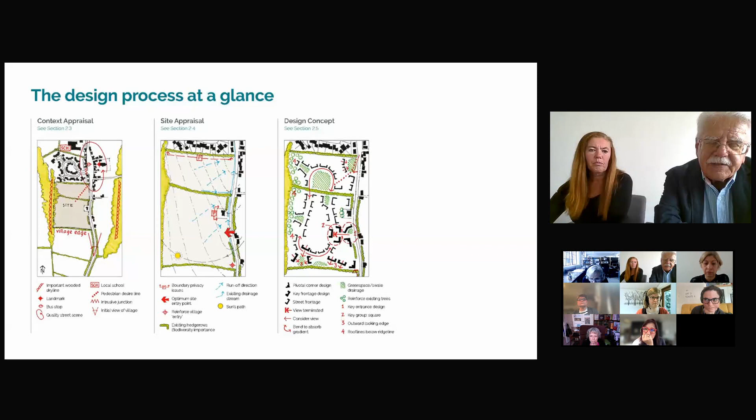So this is just a small taster of some of the illustrations, and I did think about calling this presentation 'Where Do We Draw the Line?' because very often in design guidance, if you have absolute minimal graphic indications, people say it can mean anything to anybody. If you have a diagrammatic illustration of what you want, they say, well, is that it? So we've erred towards the latter, but very much stressed in the guidance that the illustrations are to be seen as indicative, and we welcome that to be a springboard for innovative design where that can happen.

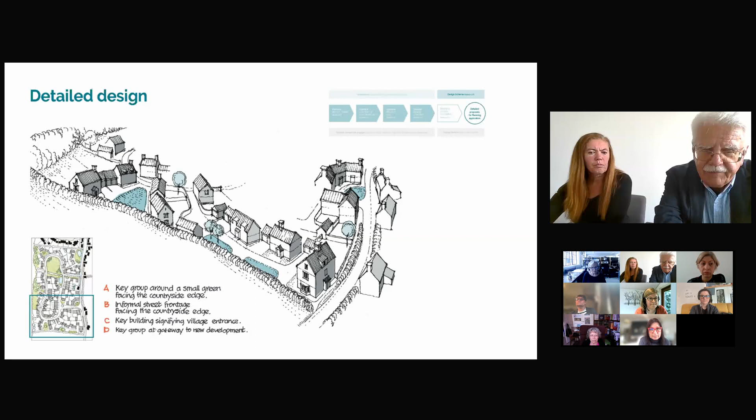So it's very important, we feel, for applicants, but also for planners. And it's important that the design guide is not purely just the local authority saying what they want, but also informing the planning staff, the development management colleagues, the elected members, everybody in the process that we think is important.

It seemed to us very important to go from the large to the small, to go from understanding the context and the site, then structuring, looking at buildings and plots, materials, and then details. Going the other way is the path to confusion and to discussion of minor points which don't really address the big questions.

At the end of each section, we had a kind of checklist of 'have you thought about' type questions, which we felt was good, both for the applicants, but also for development management colleagues to think about how they would frame recommendations.

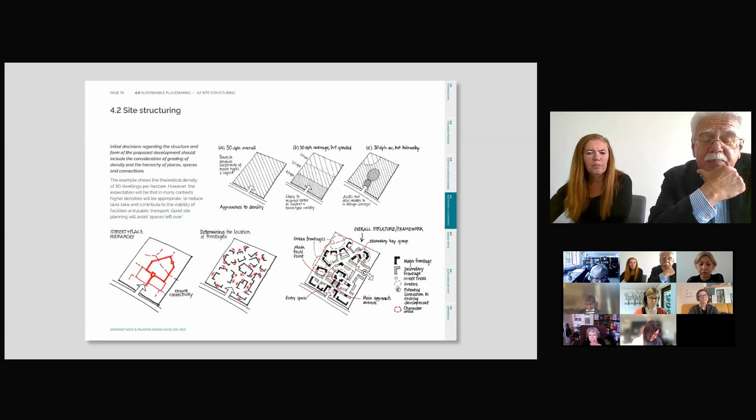For instance, thinking about the block—very often we see the block as something fairly rigid, but it can be manipulated to follow contours, the character of the streets around, and the type of tenure and density can be altered within the block, because in the area we're looking at we've got one large town, Taunton, but a number of very small towns and villages.

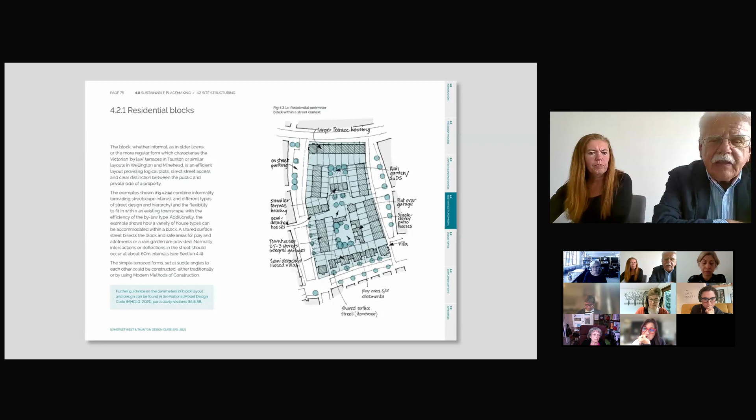So there's quite a range of development, and not all needs should be the most urban of urban design. Next, what we've tried to do here is show that sustainability principles and urban design principles can go hand in hand. Here on the sustainability principles, you can see how landscape has been considered functionally—rain gardens, plenty of absorbing spaces, ponds and community orchards, street trees, gardens themselves, green walls, etc.

And the next slide shows the same layout in terms of looking at flexible blocks and central areas for neighbourhoods, all within walking distance, the streets being as convenient for walking and pedestrian penetration as much as they are for vehicles.

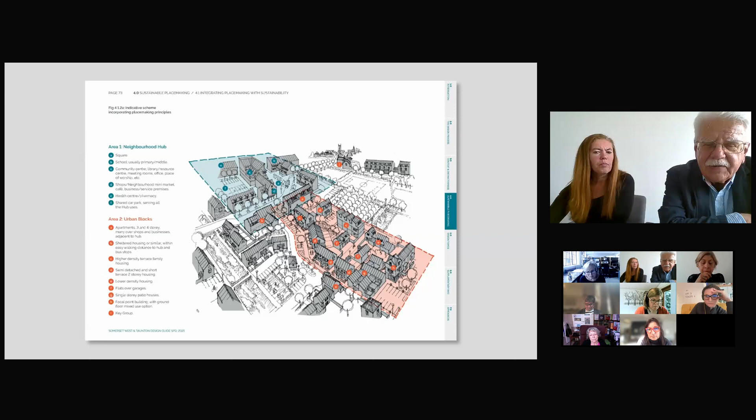We felt that it was important to emphasize—we've got a couple of minutes left. Thank you very much—to volume house builders, that they ought to develop a typology of house which contributes to street making.

And I guess this is the basis of good coding—building types that turn corners, building types that address focal points, building types that are adjusted for slope, building types that are pivotal buildings. So we went through about 12 types that we would encourage people to think about.

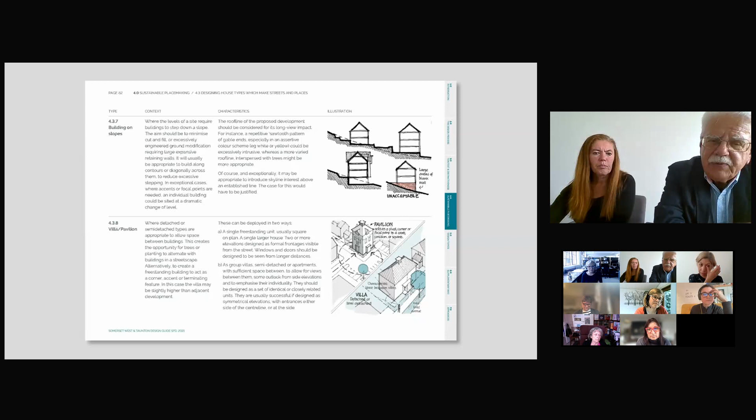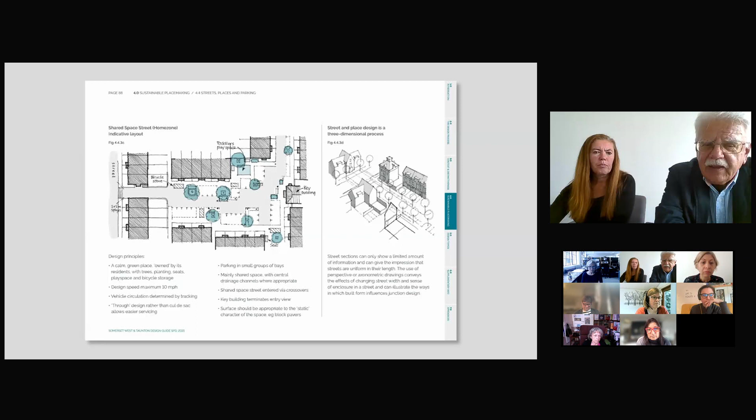Also thinking about things like hierarchy of streets, home zones—these were developed with a highway authority. And then very importantly, how do we learn from locality?

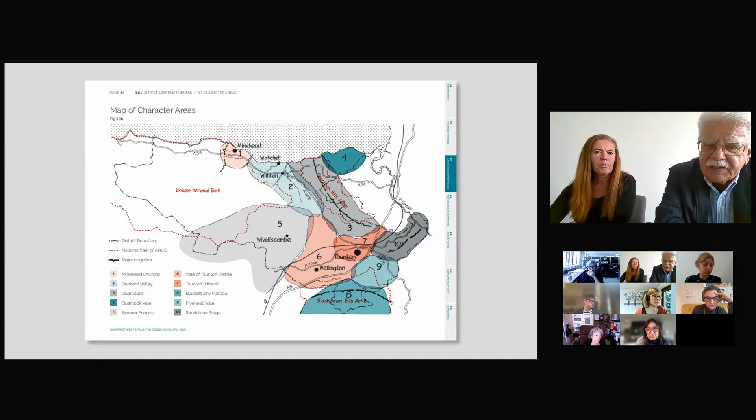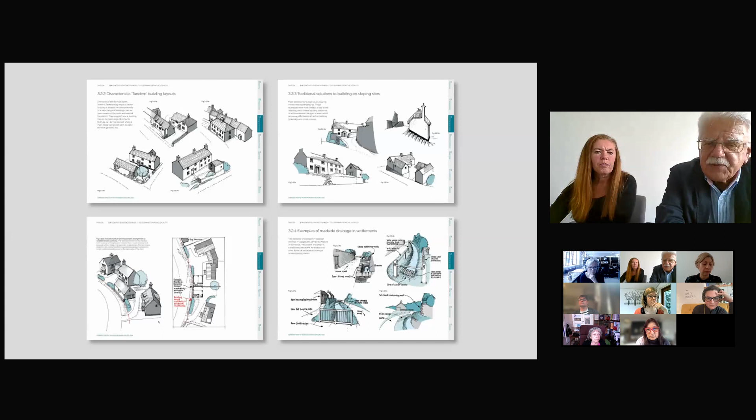Looking at patterns of development that's been built up over time. Districts are not homogeneous—they have different characters, and we stressed an analysis of those characters, and that there is a typology of inherited buildings which are important, and the ways in which buildings have traditionally related to the landscape.

Finally, it's very important that development management colleagues are tied right into the process, and we had a series of training sessions and programs, both with development managers and with volume house builders and with members, and that's continuing.

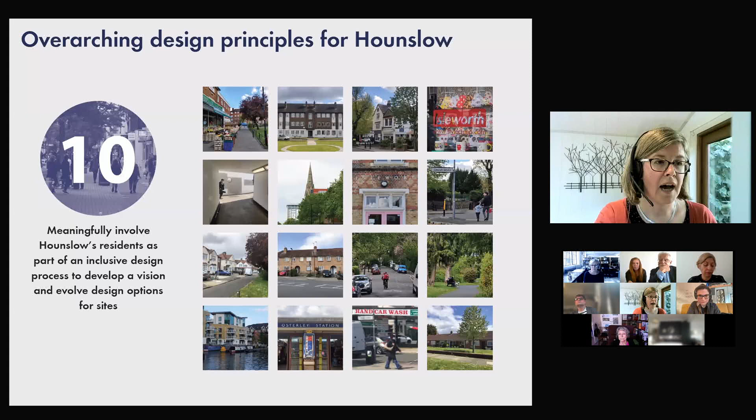There were wider bits around resident engagement, emphasising those pieces as part of the statements, and particular requirements for each application to demonstrate a good understanding of context. They had to show how they'd used the evidence within the SPD, and also how design options had been developed, refined, and how they were meeting the wider requirements.

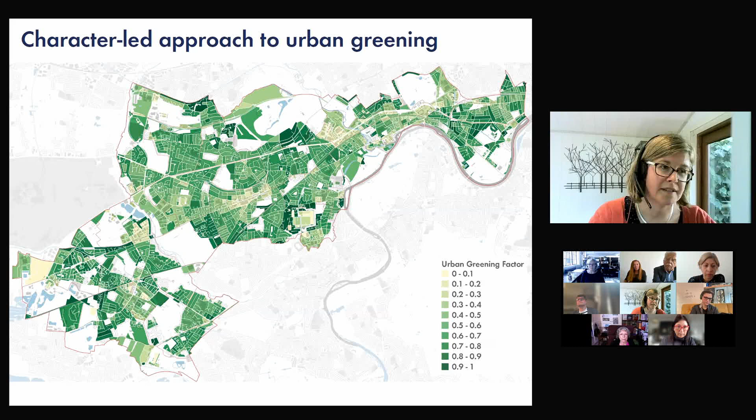Two bits we particularly looked at at that borough-wide level were around urban greening coding. There was a real desire to see if we could bring the urban greening factor analysis of existing neighbourhoods into underpinning resilience in the future. So we set a base level of code around urban greening at the borough-wide level, with a commitment to update and raise that level as further local plan reviews take place.

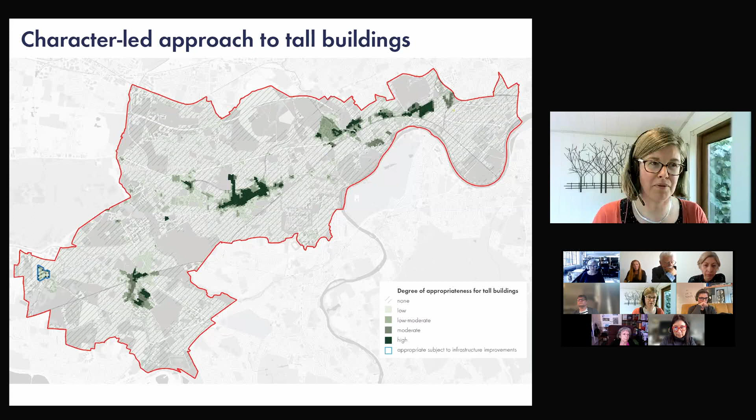The other bit was around tall buildings, which is a big local issue. There was a real desire to identify areas that wouldn't see tall buildings - that was a big local priority - but also a sense of where things might be appropriate, not where they could absolutely just happen, but where they could be.

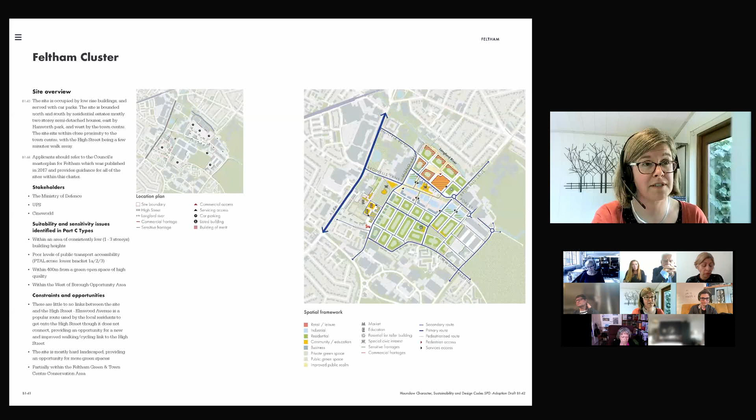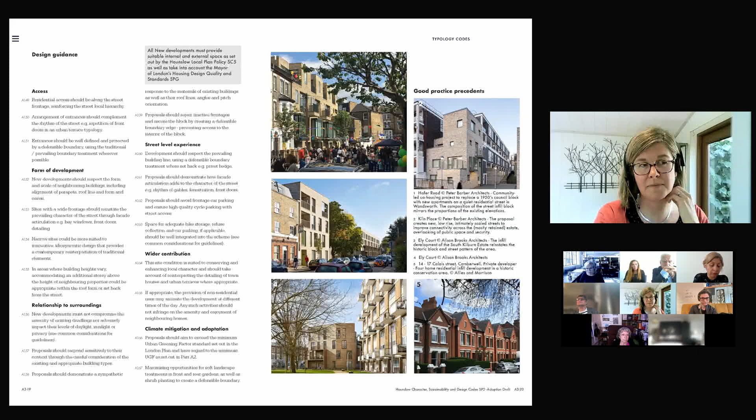On some of them we were able to provide additional design codes around particular sites where those were felt to be relevant, and on the site type side we were able to work through examples. So we provided guidance around form of development for aspects like intensification, and worked through an example. This became a really useful way to provide design coding at a site-based level that was applicable to wider sites within the borough.

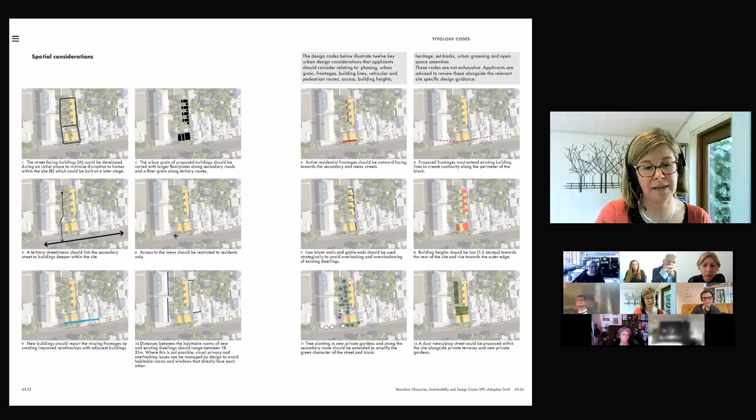So it was a really interesting process, and I think crucially a really big collaborative piece of work that has taken a huge amount of refinement with the community, and as I said at the beginning, it's very imminently about to be formally adopted.

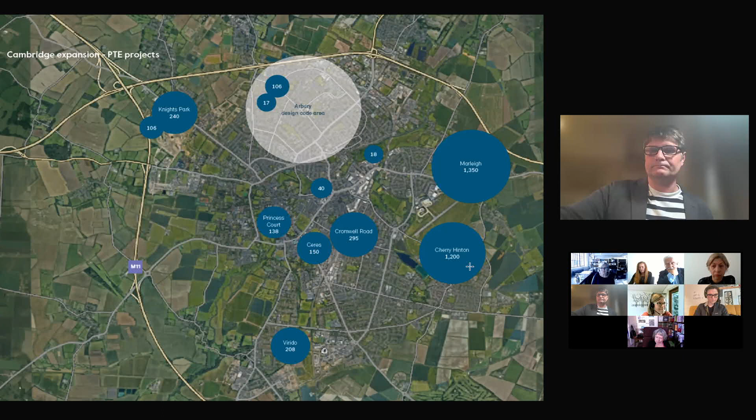Thinking about that confidence building and relationship building process, we started with a project study tour where we took our client and the key strategic officers for the Greater Cambridge Planning Service. We spent a day together going around recently delivered residential developments that had been delivered using a design code. What we wanted to do was build a really good shared idea and shared experience of what good looks like, and what we're trying to achieve.

What worked, what didn't, from previous codes? By having the people who'd actually been part of those teams there on the trip, that really helped give us a head start in what we were doing, and it also started to build that idea of a shared vision.

That then launched what was quite a dense process of different workshops, events and processes that we went through over the 9 months. We essentially broke that into 4 parts: a mobilization process where we brought people together, which culminated in that study tour.

We then moved on to a principal stage, spending a few months together going through a series of workshops and also working with the local community. There were still concerns around COVID, so much of this was online, but we were able to have quite a few processes with local residents and with the local parish council through that.

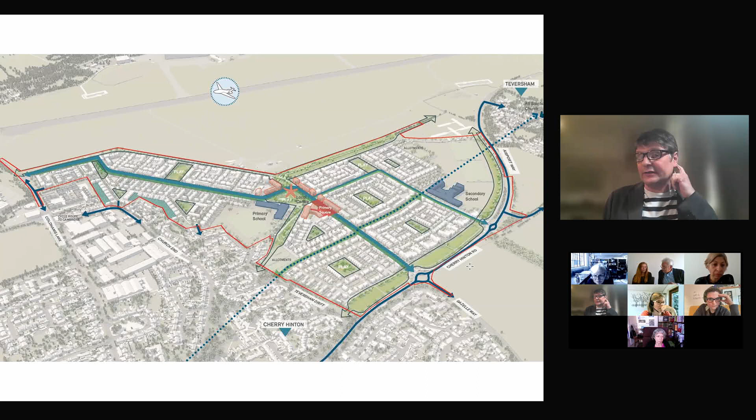Those individual neighbourhoods are then interlinked onto a network of green routes. These are traffic-free, car-free cycling and walking active travel routes, which crisscross the whole development and link everything together very conveniently and directly.

They also link together the planned secondary school right through on what we call the Ridgeway, going east-west, taking us down to the existing settlement of Cherry Hinton, and then linking up with the new Market Square and Village Green, which contains the primary school as well.

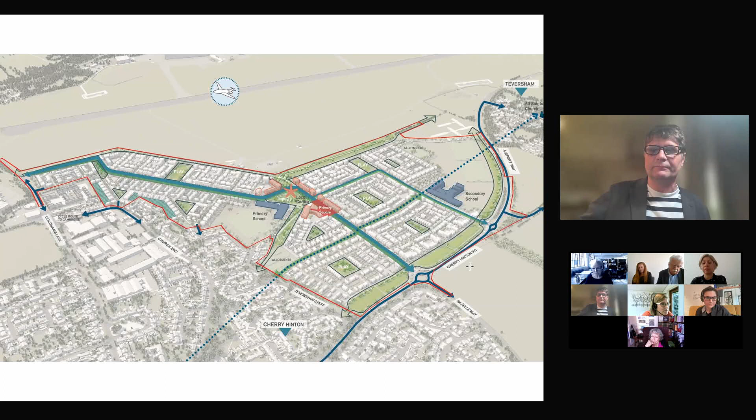Let's go to the next slide. The fundamental to how we were thinking was trying to see things in quite granular detail, always thinking at the scale of walking and the pedestrian - in this case trying to show how you draw together design for buildings, design for the street, design for urban greening, and design for things like visitors, gathering and social gathering.

And what you can see from these diagrams is what we're trying to do, thinking about the holistic design approach we were talking about earlier.

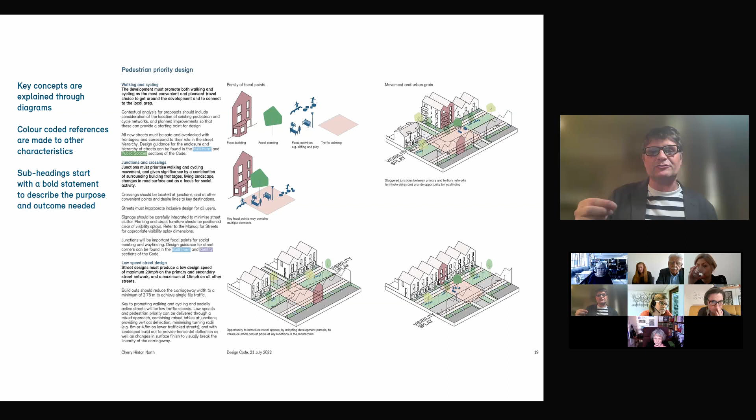Everything is explained through diagrams - diagrams are the key part of the code, really. They're colour-coded to make references to other characteristics. Then in the text itself, we use quite a controlled form of text, which cross-references to other parts of the code through colour coding as well.

Also, what you can see here is how buildings were coded within the diagrams to really make sure that all frontages were engaged with the front doors or principal windows, to get that sense of eyes on the street.

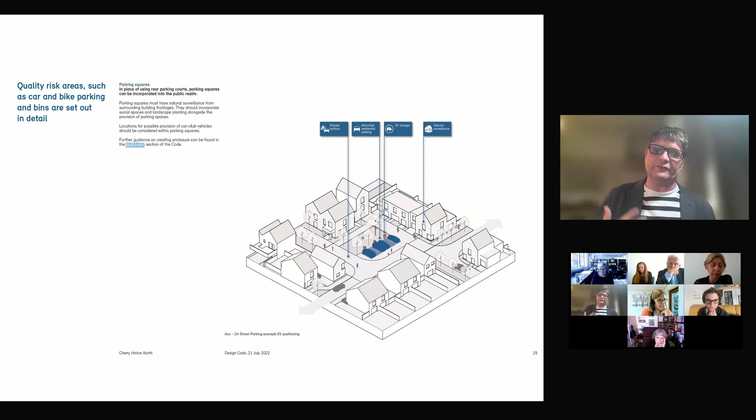Streets were all designed to incorporate street trees and urban greening from the outset, and also social spaces. And we worked really closely with the Highways Authority to enable us to do that.

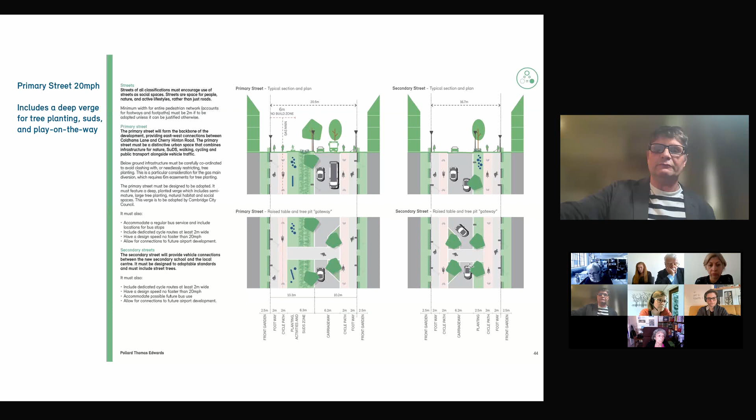A key aspect of that, beyond the street design, was thinking about the speed limit across all streets being 20 miles an hour, going down to 15 miles an hour on smaller residential roads. But also thinking particularly about things like street trees, and how we could actually deliver those, making sure the code, in asking for it, wasn't setting itself up to fail, which often happens with design codes.

So in this case, we set up meetings early on through the design coding process to talk about adoption, about who would manage what. For each type of street and each type of space, we developed a diagram showing where adoption boundaries were, in this case between the Highways Authority and the city. Working together, we were able to make sure that everything from edge to edge had an adoption, had someone looking after it, and there was an agreed strategy for how that would work.

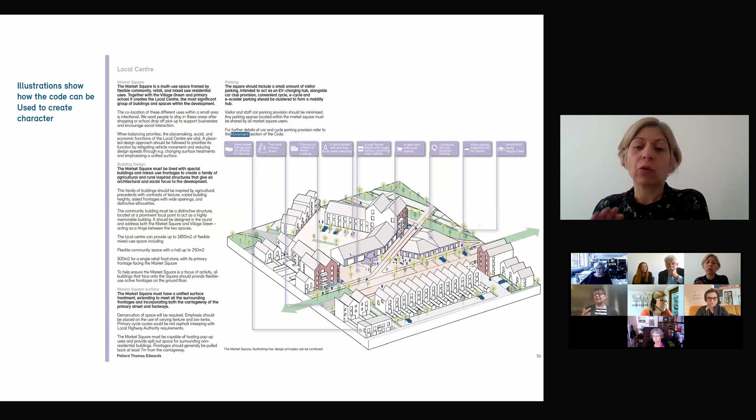Just two more slides. When we're thinking about co-location of uses, this is a really good example, this diagram of how different aspects of the different uses within the village centre could be, and should be, brought together, in this case around a small market square, really highlighting how those different uses need to focus onto that space and make it active, giving it activity throughout the year.

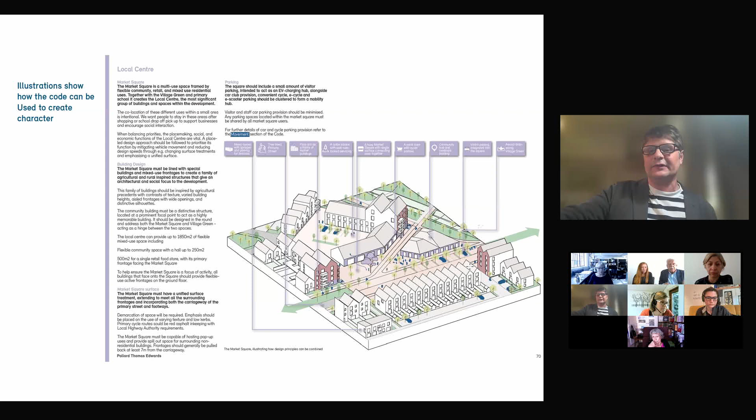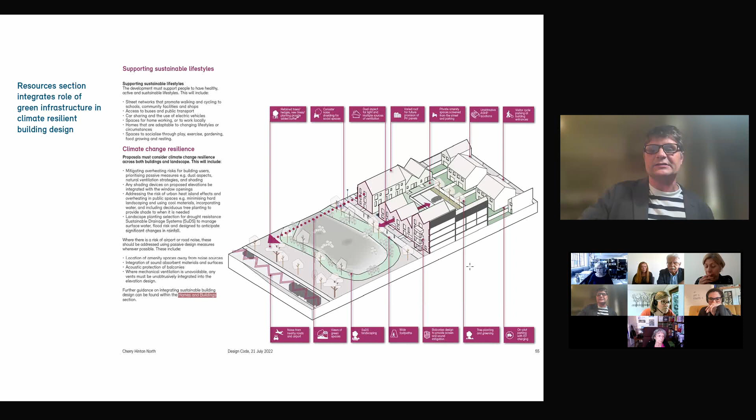Sustainability was handled through similar diagramming processes, really emphasizing things like dual aspects and cross ventilation. In this case, we were able to use the code to create 94% dual aspect in the first phase, and in the second phase, which is just starting now, we're at 100% dual aspect. A lot of that was delivered through a checklisting process to ensure that was all being delivered.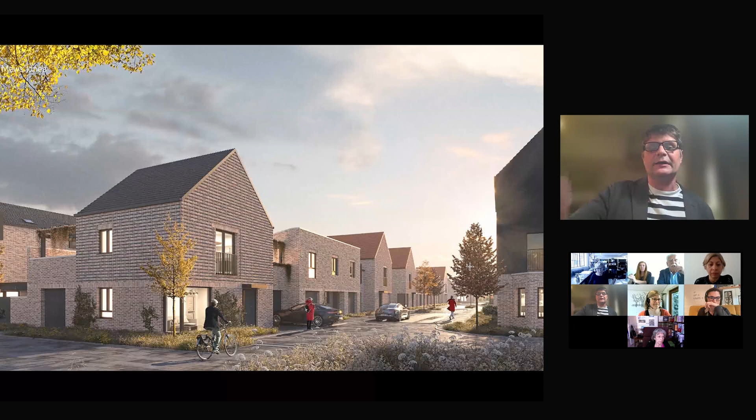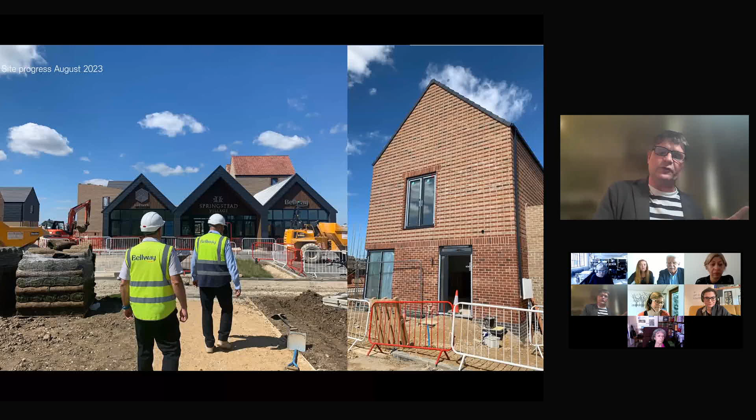And then finally, just some CGI showing phase one of the designs that we have proposed, and we're really excited to see those buildings just starting to be delivered. It's feeling like the quality that we were expecting through the code is actually being lived up to on site.